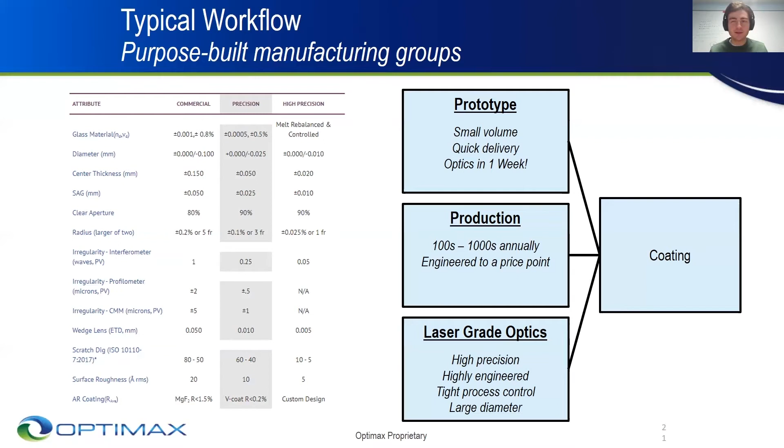Throughout most of the facility, we typically run orders that are very high mix with low volume. Even our production sector typically doesn't have many bulk orders that last more than several months, a year at most maybe. That is, until now.

We've recently been approached by a customer that needed help designing a process for a particular class of optic. I don't want to give away too much, but this particular species of optic, especially with the size and quality they want, could typically take months up to a year for us to produce very few of these optics.

Our customer approached us asking if we could decrease our takt time by over 600%. But there's a few catches that made this particular simulation project incredibly complicated.

Firstly, before going further, I just wanted to define takt time here. It's not necessarily the same as lead time, which incorporates the time between part ordered and part received. Takt time is defined here as the amount of time between when we start doing something on the surface of the substrate to when that optic is complete to the specification the customer wants. It doesn't include things like material acquisition, time at the beginning of the system, QA, packaging, shipping, etc.

In just takt time, the estimate for the quality and size of the part our customer wanted was extremely long. And as I mentioned, the goal for this project was to decrease this time by over 600%.

I haven't even mentioned really the hardest part about this whole project. We don't even know what we're designing a process for. At its core, our customer wanted us to design the simulation, not to simulate a direct replica of the real world, i.e. a digital twin, but rather use Simio to design the process itself. We know general specifications, general size, general weight, a list of substrates it could possibly be made out of, but we needed to use Simio to implement controls of an agnostic process, something that is totally oblivious to what the part is itself and what the process is itself.

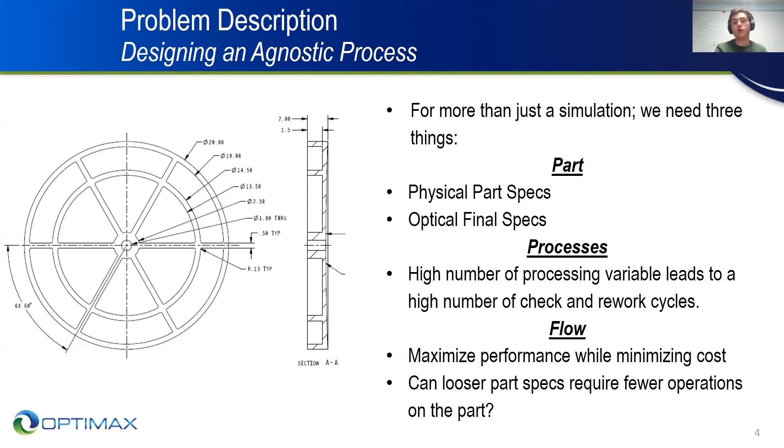I just wanted to put this slide in here just a little bit, so you can see how complex some of the shapes are that we're actually manufacturing.

The challenge of precision optical manufacturing is marrying the physical specs with the optical performance specs. It's more than just making sure the part is the correct shape. We always need to keep in mind that the parts we make will undoubtedly be just a single part to a larger system. We need to make sure that through measurement processes like metrology, we not only meet physical specifications but also meet these performance specs so that our part isn't the hindrance to the system.

It's often said in our industry that there's no point making the part if it's impossible to quantify the quality of the surface. You could have the best optical surface in the world, but if you don't have anything that can measure and verify it, what good is it?

Some of the final specifications for the surfaces we make can be so minute that they go down to the sub-nanometer level. If you don't have a machine that can measure past that resolution, then how can you be sure that the part you're manufacturing and the process you're using is a good one?

Large-scale projects like this not only have typical capital expenses in machines to manufacture the part, which can cost over $1 million on their own, but the measurement machines needed for such high precision can also cost equal to or greater than that amount. It can be scary making such an investment into a piece of equipment that, to the bottom line, has no value added to the part itself, but is unequivocally necessary to the process.

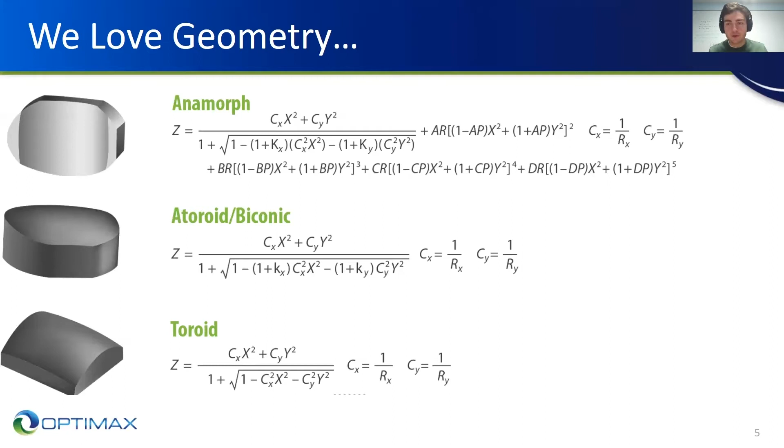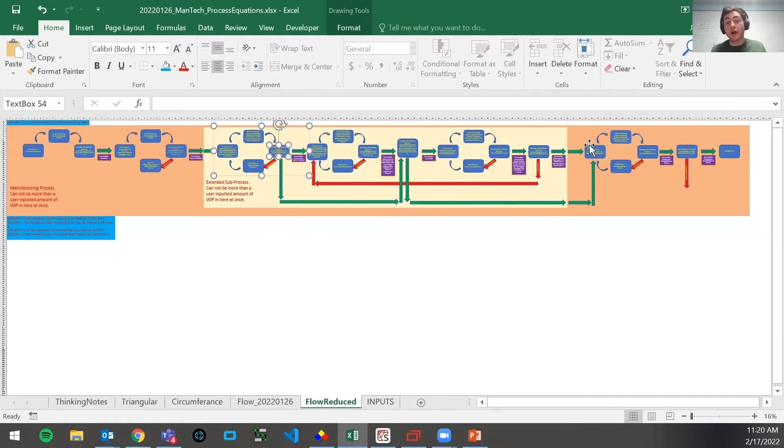And then you come over here and just totally exit the sub process in general. It's a very rare case, but it could happen. So we implemented the real world situation into our model.

The more likely case, which happens more often than I like to admit, is that we go through this sub process and end up getting to this check at the very end of the sub process, where we find that one particular part of our part isn't as good as we'd like it to be. So we have to send it way back to the beginning of the sub process, close to the beginning, in order to go through the entire thing again.

So each of these processes, these cycles, target two things in particular. I don't want to give away exactly what they target, but we'll call them error species 1 and error species 2. Those are the two things we're trying to reduce here to get a good quality part at the end.

The tricky part is that most of these processes, in fact, the first, second, third, fourth, and sixth, all reduce the first type of error while increasing the second one. And then you can probably guess what the fifth step does: it reduces the second one while increasing the first one. So it's sort of a balancing act.

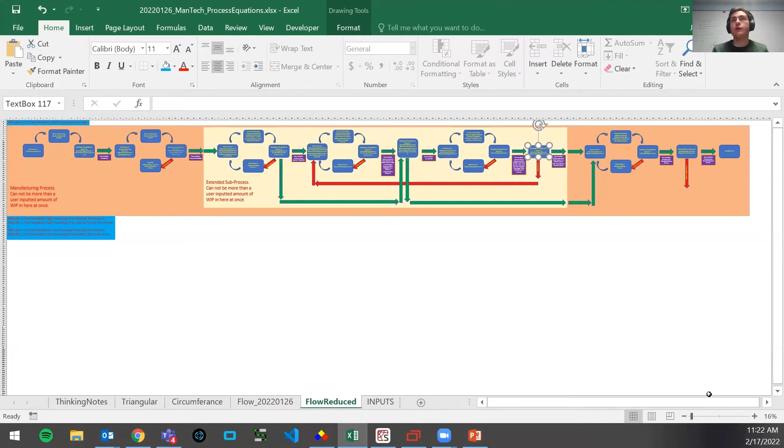You want to get the lowest amount of error in total possible, but how much error can you pass on to a next process such that you don't induce so much of a different one in other places? All right, so I'll zoom in here now and show you a little closer some of the actual details.

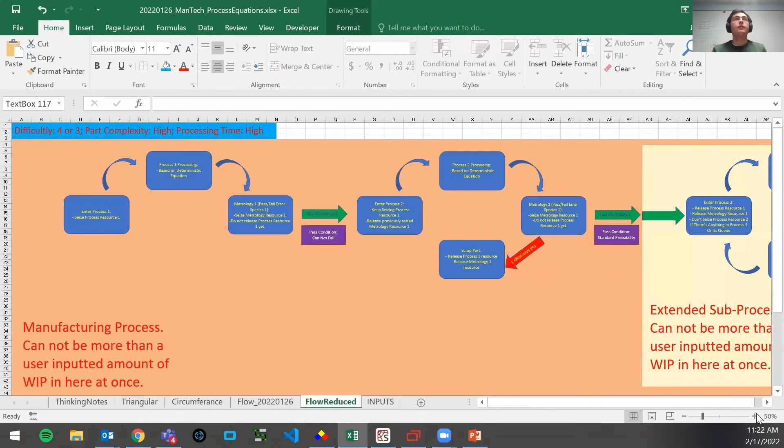All right, so I'll describe this blue section up here in a little bit. We have our first process, pretty straightforward. We enter the process, do the processing, either pass or fail the initial metrology check. If we pass - and it actually can't fail at the first one - so when we pass, we go into the second one, processing.

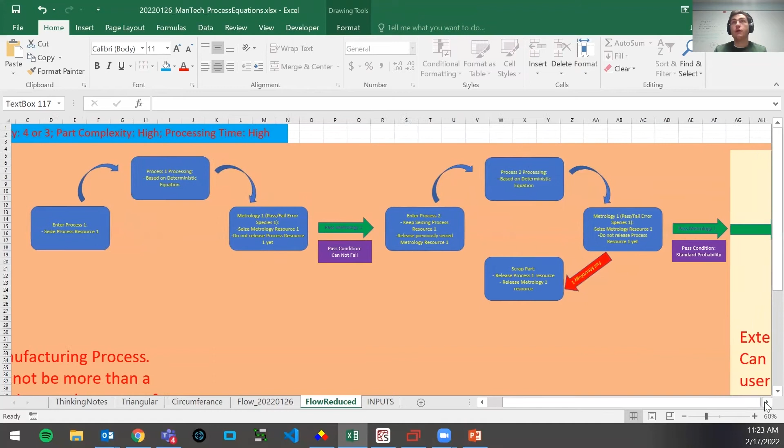We enter it, we process, we do a metrology check. And in this case, if we fail, we actually want to just totally scrap the part out of the system in total. But if we pass, then we continue on to the subsystem over here, where this is where we expect our bottleneck to be, where most of the parts will spend most of their time in this system, which is why we want to be so careful about how many parts we let in here.

Definitely a good experimental variable that we'll use in the future.

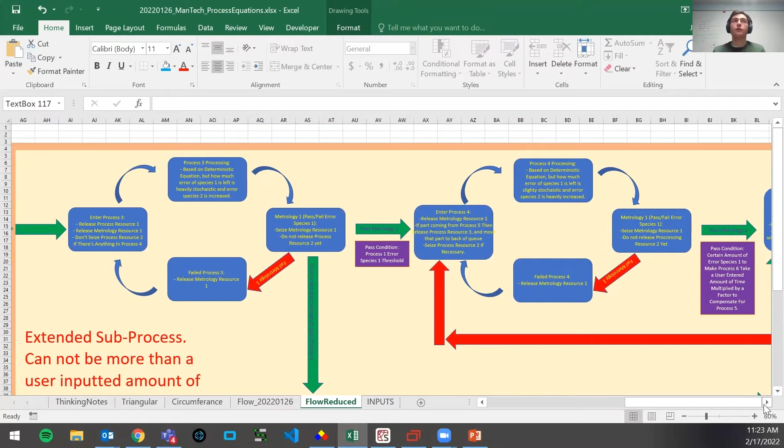So in this process, we let a part enter. The first two steps decrease the surface error, surface species 1, while the third step in this sub-process decreases the second one while increasing the first one. So, as I mentioned before, you can kind of get stuck in this loop, and it can be sometimes quite difficult to exit out.

Another fair point is that we have it set up so you can only go through a certain process a certain number of times before we scrap it out of the system. It's just gone through the process too many times. So in order to not have one problem child stuck in the system constantly taking up resource space and time, we just kick it out of the system when we feel like it's a lost cause.

Once we exit the system, we enter this final step in the process, which is actually incredibly deterministic and will get rid of almost all of the error on the part. However, there's a trade-off that it takes an exceeding amount of time. So you could essentially just throw a part right into this final step and say, get rid of all the error, make the best optic in the world, but it's going to take you about 2 years to make one. So, no thanks.

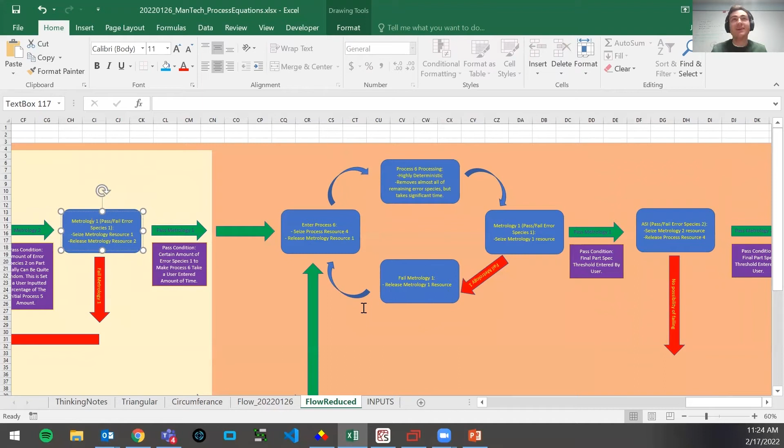Okay, so now that I've pretty much described most of the process we're trying to implement, a few minutia here and there. This part describes how we want to be able to skip certain parts in the process. So there are 2 parameters the customer should be able to enter.

They're not called this in real life, but I just wanted to mask what they're called here. I call them difficulty, which can be on a scale of 1 to 4, and part complexity, which can be either high, medium, or low.

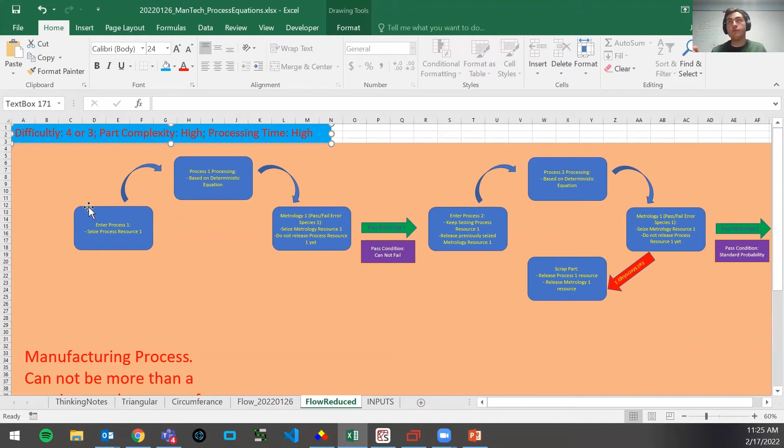Based on how high both of those values are relative to each other, the processing time is either high, medium, or low. If you have a high processing time, you typically spend a lot of time getting the part to a really good optical quality, but then you sacrifice takt time, you sacrifice your bottom line, increasing both of those while decreasing the error of the part.

So you can have these different flows where, based on the difficulty and part complexity, your process time varies. We take certain parts out of the entire process, changing the flow of the part, and that will start to sacrifice your optical quality a little bit. But if it's really takt time and the bottom line that you care about, this might be what you want to try and implement.

Done that. I want to go back to the PowerPoint and give a quick introduction to what I'm going to show you in the model.

Now that I fully described our process flow and the project we're trying to implement, I wanted to demonstrate 4 key structures we have in Simio.

Firstly, the animation, which provides our customers a detailed representation of the cell in our facility that will manufacture these parts. It's prone to a little bit of physics breaking, so just a fair warning.

Second, I wanted to demonstrate how we're able to visualize the results and possible changes we make to the part and process itself to see how we can improve throughput.

Thirdly, I wanted to show you how we implemented some custom processes for the unique metrology and surface testing that we have.

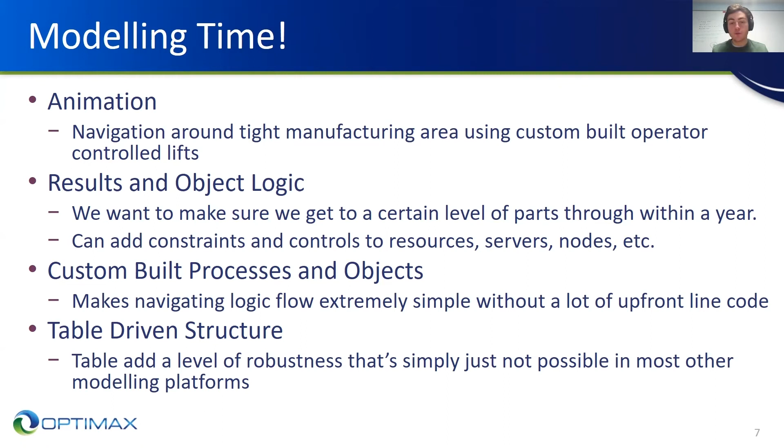And lastly, but most importantly, is our table structure, which adds a level of robustness that's simply not possible in most other modeling platforms.

All right, so without further ado, let's head on over to Simio.

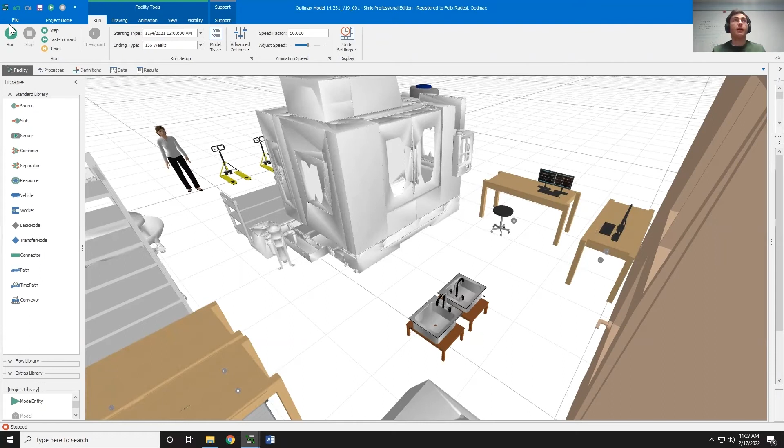So the first thing that I just want to show you is just a little bit of the actual 3D animation that we got going on here. That's not the right button.

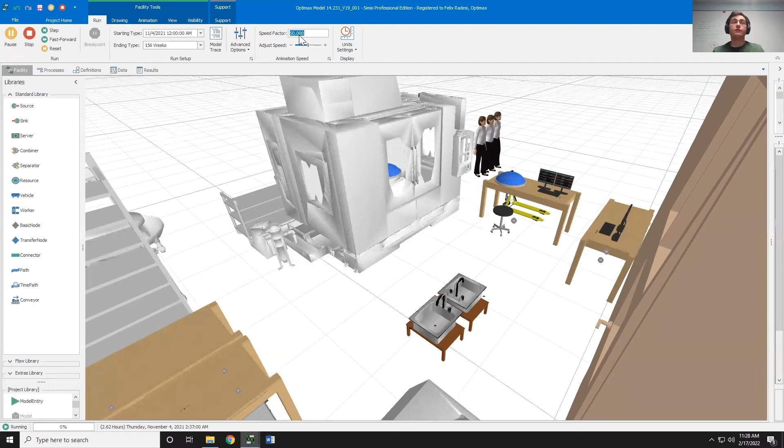So you can see that the parts come in and then they wait inside of the machine while they're being processed. A lot of the processing times in this are quite large, so it's pretty difficult to really see flow through the system unless you really speed it up. And these parts are going to start going really fast.

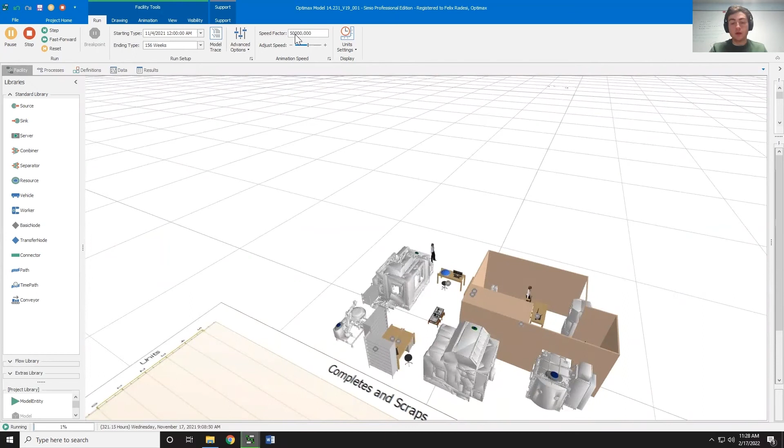So yeah, you can see there's another part in there now, and they're kind of moving them around the system. We can increase this even a little bit more. Parts are really going to start moving. All right.

And now I have this other model set up over here that has a little bit less detail in the 3D animation, but a little bit more detail so you can really see what's going on between the transfer steps in the process.

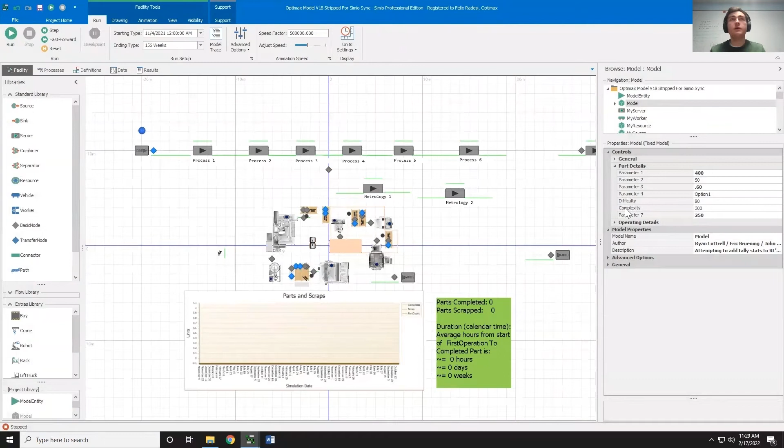So you can see that you initially enter parameters over here. We have difficulty and complexity, which will kind of dictate which parts of the process we either keep or remove. And just as an initial test, you can see that the parts kind of flow through the system, going on their merry way.

We'll fast forward, you can see the results. Bam. And so you can see that over time, this is over a 3-year period, we get simulated about 46 parts out. And these numbers don't really mean anything, the parameters I have running here don't mean much.

Okay, so over to our processing logic, we can see here that we have a lot of unique custom processes that we've defined here to dictate how parts flow through the system, the logic of what happens when a part fails, when a part doesn't fail, when a part can even fail in its own right.

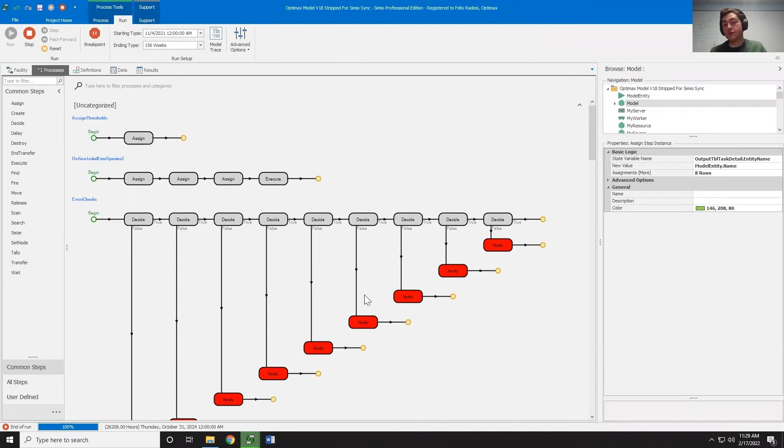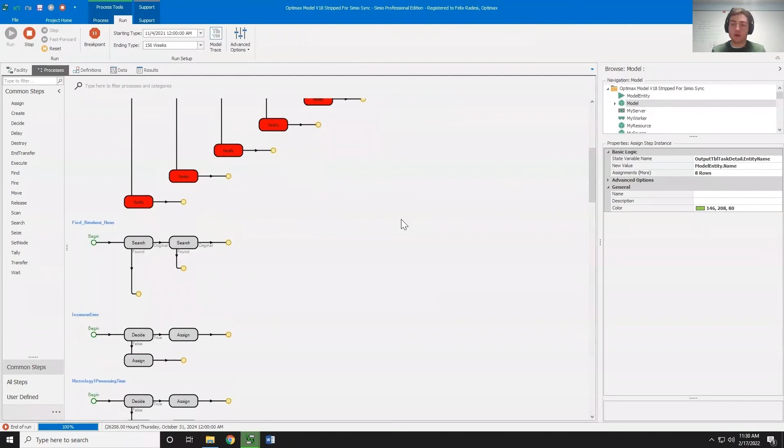We have a custom model entity, a custom server, which allows us to dictate how each server interacts with each model entity and how each error species kind of reduces or increases on the server side.

So you can see here, in particular this one, the metrology failure check was quite undertaking in order to smooth out all of the process steps that really needed to be done.

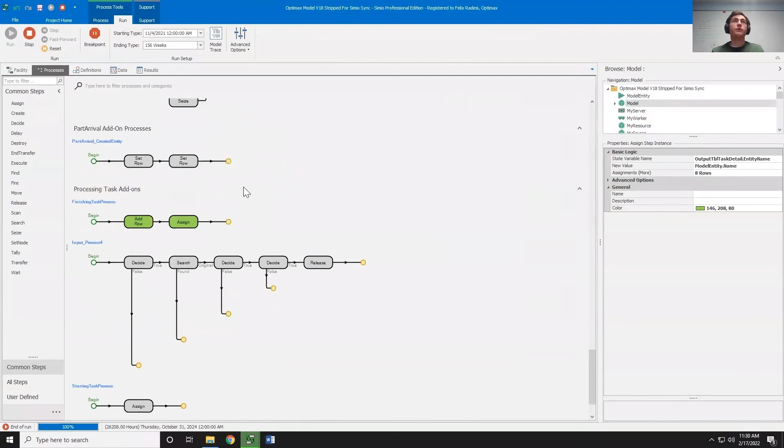And probably one of the biggest notes is that when the simulation starts, those two parameters, the difficulty and complexity, will really dictate a lot of what happens in the rest of the process.

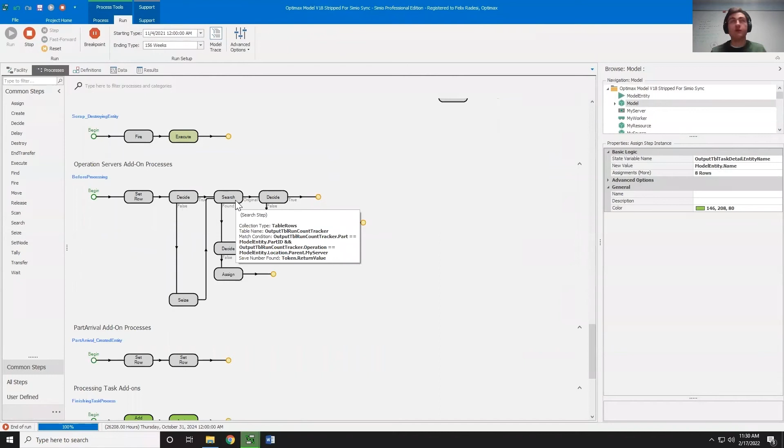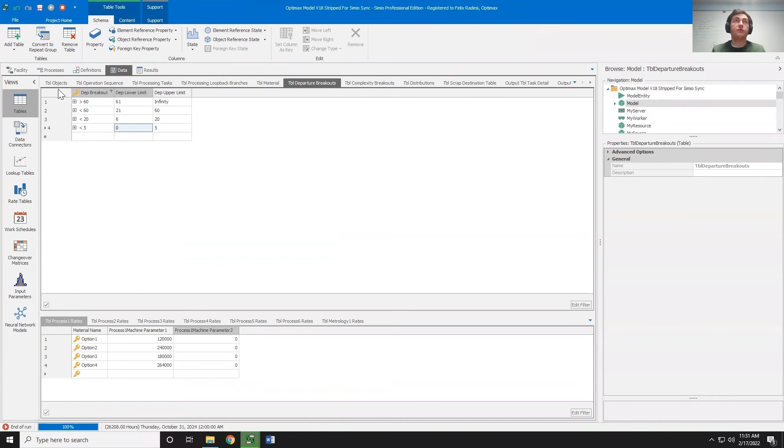So I'll show you some of the data tables we have. We have error species 1, and then there's error species 2, and, or sorry, these are complexity and difficulty, which help change where your breakout basically leads you. We call these breakout tables, and it leads you to a different part in the process based on what your two inputs are. And you can see that we have basically our entire system set up as a table structure.

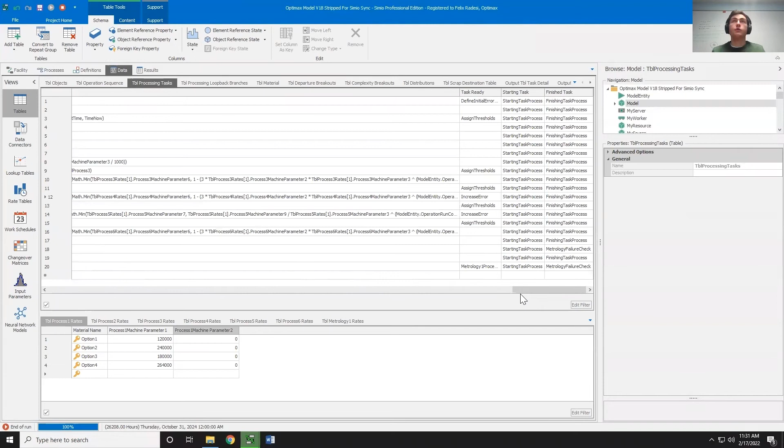We have our processing, or well, I guess these are the error species, how they get removed from the part, depending on which process you're going through. And then this is also the error species 2, how that changes depending on which process you go through. And then we also have how the actual processing time is handled here.

With each step in the process, different things can change after the actual step is completed. So we decrease the amount of one particular type of error on the part during different parts in the step. And these are our equations for processing time, which are based on the machines that we have down on our shop floor.

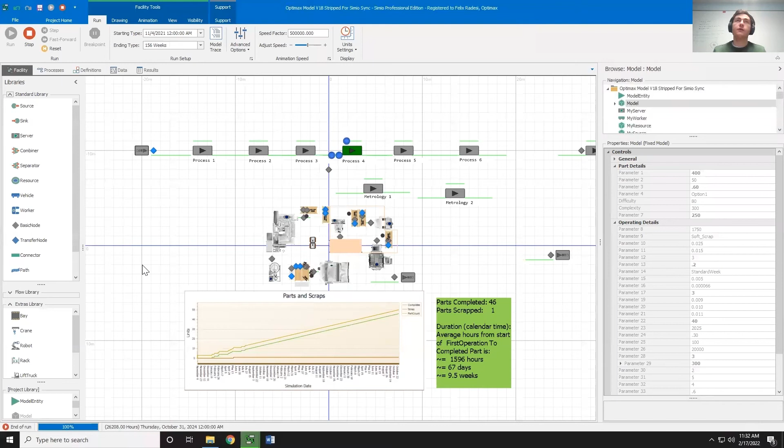And so, yeah, that's in essence the biggest part about what we implemented here, is the data and table driven structure. That's really the core behind the simulation that we've built up here. All right, so now I'm going to go back over to the PowerPoint.

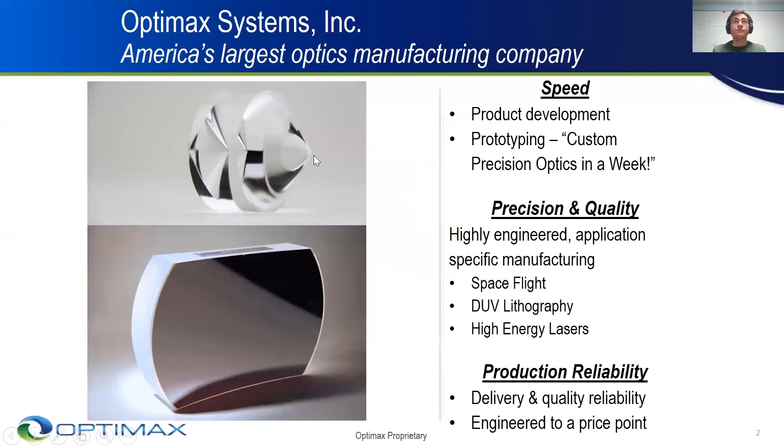All right, and just to wrap up here, I just wanted to outline some of the biggest challenges we encountered while attempting to simulate our floor in order to design the agnostic process. Simio has many features, so the learning curve from novice to master modeler is a little longer, depending on the individual's background and skill set.

Fortunately, Simio offers hypercare with expert modelers who can assist new users. Shout out to Ryan Luttrell.

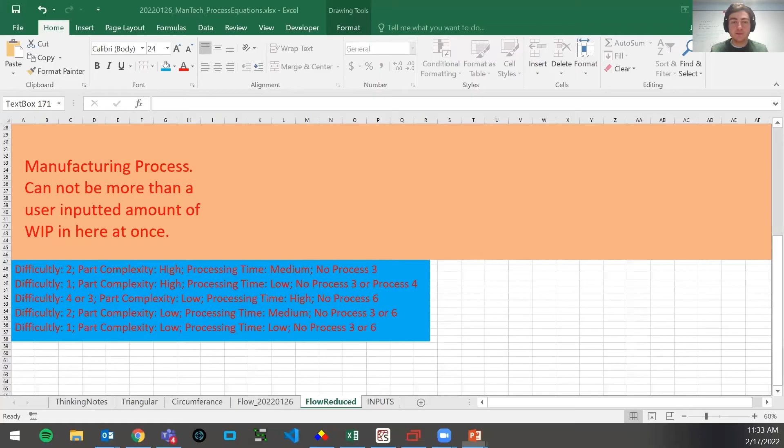All right, thanks John for the great presentation. I know it can be difficult to go through that much detail when it's blinded, so I just want to say that was a great presentation, and I appreciate the shout out as well. So to get started with some questions we have, can you elaborate a little bit on how you were able to create the process flow without the part or process actually existing or being anything you're doing today?

So I suppose a lot of the shapes and materials that we frequently see through our shop are pretty standard. We have a lot of people with a lot of experience who can have a good gut feeling, saying this will probably take about this long, and this particular machine will do this to this type of part. So it's mostly just relying on the experience of others to get that sort of data. Eventually, hopefully we'll get actual physical data over time as we run more parts through our system and have more structured ways to get data and run demonstrations. But until then, it's pretty much just people with experience. Just a lot of tribal knowledge, huh? Yeah, yeah. Great, okay.